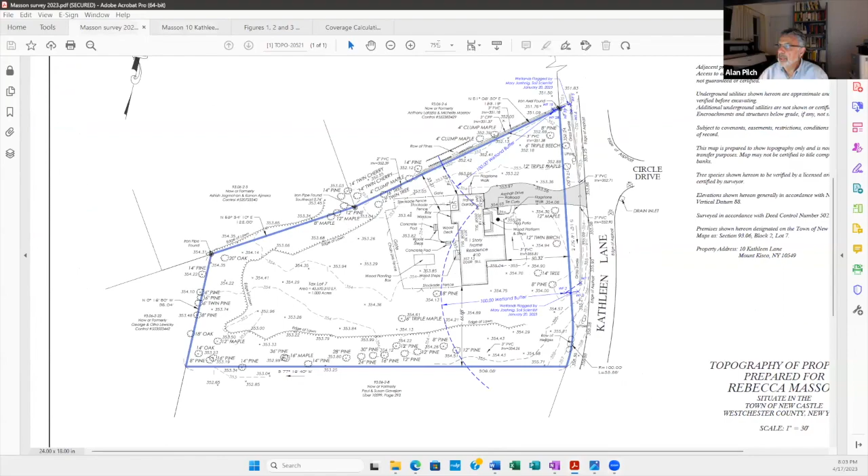Let me just start with the survey drawing. Property is on the west side of Kathleen Lane, it's an acre in size. There's an existing house in the central portion of the property. There were a couple of wetlands identified in the field by Mary Jaehnig. She identified two wetland areas located at the corners of the property, if you will— I'll say associated with, but she didn't mark them out.

And when I visited too, there's a grass swale on the property, kind of parallel to the street. It runs both on the east side of the street, the other side of the street, and this side, and they're really like grass ditches.

They only carry water during precipitation events. When I've been there, they've always been dry. There's a little culvert that runs under the driveway, continues further north, and this continues all the way further to Kathleen Lane's intersection with Bedford Road, Route 117.

You can see here the 100-foot buffer shown on the property. It includes the entire driveway, good portions of the house, just a little bit of the house was excluded out of the buffer. So that's what was identified on the property.

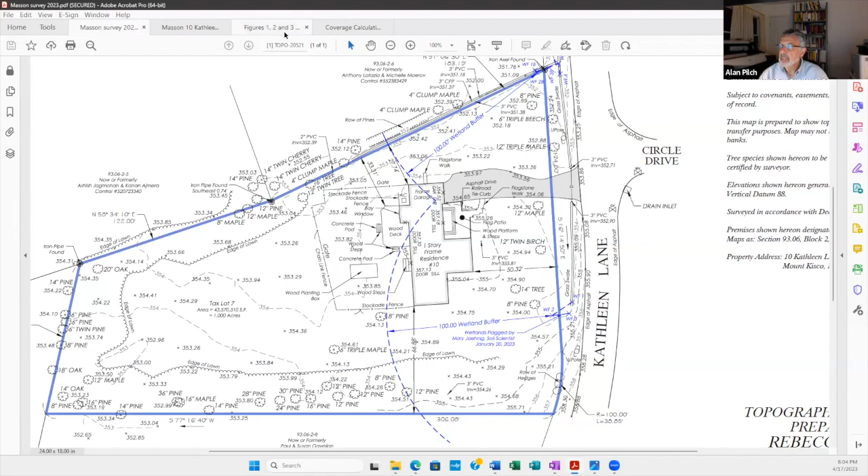I'll go to what's being proposed and break it down. What's being proposed on the property is to construct a new garage attached to the house and convert the existing garage to living space, and also construct an addition at the back of the house. A portion of the garage would be within the 100-foot buffer. The house addition is outside the buffer.

The driveway is also being realigned because the current driveway comes into the garage, and it's being realigned basically to access the new garage space. In addition, there's an existing extensive flagstone entry that's going to be redone, with a new bluestone walk to the entry itself. That's basically what's being proposed on the property. There's some drainage work too, which I can go into afterwards. But I'll just show you what was analyzed on the property.

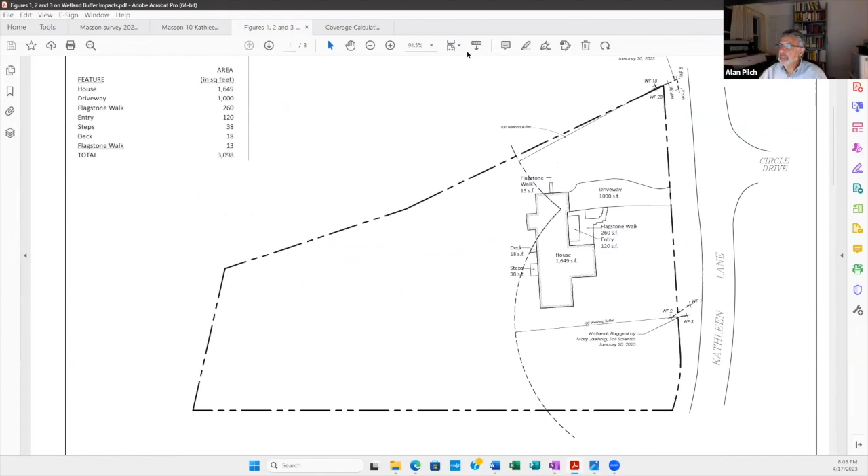This shows the existing impervious surfaces within the 100-foot buffer. As you can see, there's 3,098 square feet of impervious surfaces in the buffer. Most of the house, all of the driveway, that flagstone walk in the front, and a little flagstone walk on the north side of the house, north being up.

The removals are shown on this because the driveway is being realigned to access the new garage, which is going to be located here. So what's going to be removed is portions of the driveway, portions of the walkways which are no longer needed due to the existing entry being reconfigured, and another portion of the driveway that's being reconfigured as well. So it's going to be removed.

Finally, this is the new impervious surfaces. This is essentially the new driveway to the garage, so that's a new impervious surface, and that's the portion of the garage within the buffer. As you can see, the net new impervious surface is 50 square feet. There's removals of 648 square feet and new impervious of 698 square feet, so it's a net increase of 50 square feet in the buffer.

That's what's being proposed. Are you counting the new bluestone walkway? Yes, that's all in the calculation. That's in the new? Yes, it is. It's part of the calculation in here too.

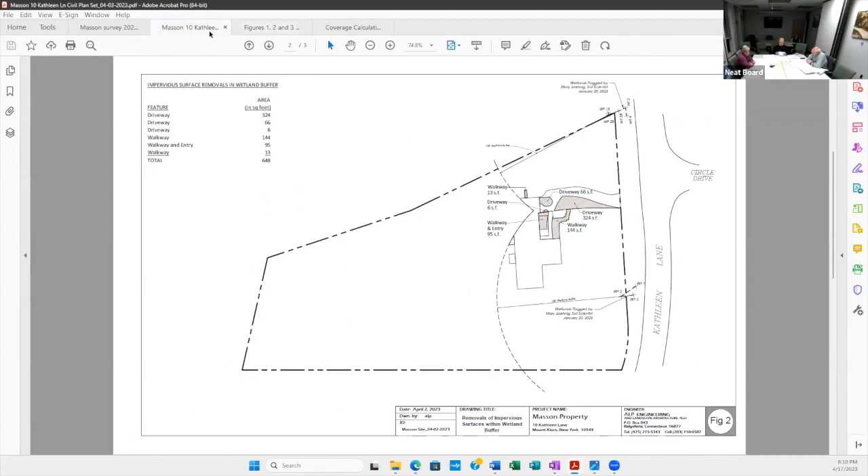Finally, there's a mitigation area being proposed, basically to fill in an area that has a view to the street, but there's also a rain garden being proposed. There are some drainage issues with the house, so we're constructing a rain garden here which would filter and provide water quality improvement. Afterwards, if there's any excess runoff that doesn't percolate into the ground, it will be directed towards the mitigation area.

Is there anything else you'd like to add to it? I'm not asking if there's anything you'd like to add—otherwise, if the board wants to run through what's happening with the architecture and why that garage is going there, I'm happy to show that to them. I can unshare if you like, and then I can certainly open it to comments from the board.

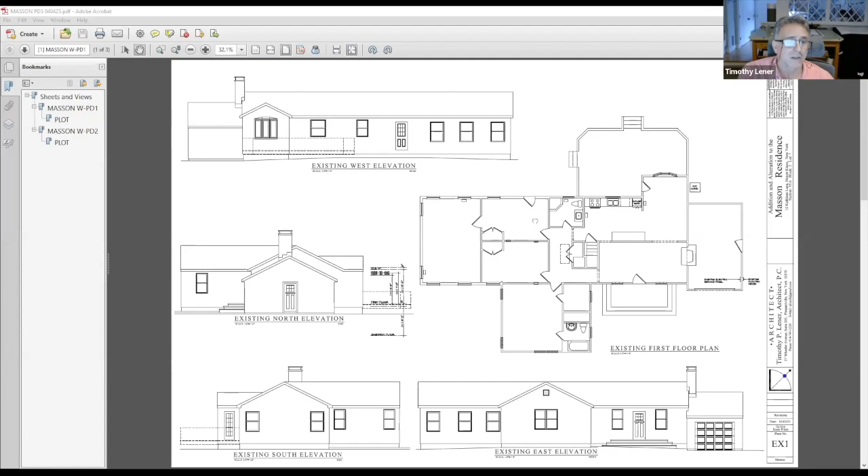So this is the existing floor plan. This is the current entry into the house, and there's a large wooden platform with steps that go down here, with flagstone paving around it. So you actually walk directly into the middle of a pretty small living room—I guess that's what they'd call it. It's very closed off from the rest of the house, and the fireplace is off center.

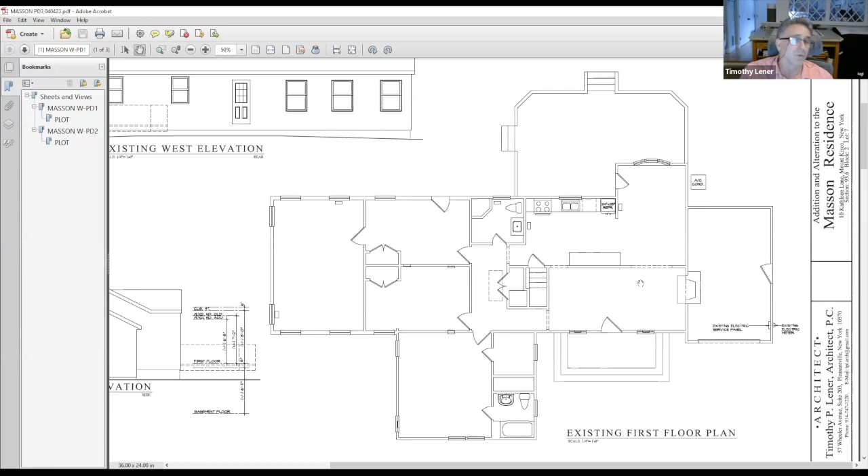There's no other way into the house from the garage—you actually have to go out and into the front door. The kitchen is pretty minuscule in size. So the idea was to recreate a new entryway further over in this corner, take the garage space and transform that into a new mudroom and kitchen off the back, and build a new garage off to the right-hand side, which you'll see right here.

This gives you a better idea of a blow-up area of the walkway, with new flagstones—but this whole entire area is already impervious with stone and that wooden platform. So portions of that can then be transferred back to green space up against the house and soften the look of the house.

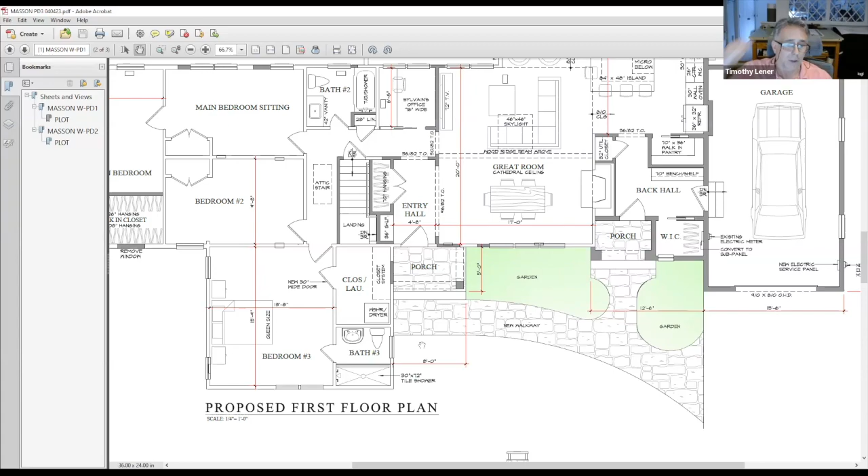So this is where the new entry will come into the house. We can give them a coat closet, take out a wall in the middle, and now you've got yourself a real living area where you can share the seating and dining space. A new kitchen will be constructed in the back.

This is the portion Alan mentioned that's not part of the wetland buffer, and the wetland buffer is right in here. However, as you saw, most of the house already is within the buffer. This is the area where the existing garage is—you can't really even park a car in there right now because the chimney sticks into it.

So we're reclaiming that space to create a side entrance—a real mudroom entry that will allow people to come in both from the front and from the garage. There'll be a few steps down into the garage for a car. We've left enough space so that trash cans, gardening equipment, and vehicle all have enough room to fit.

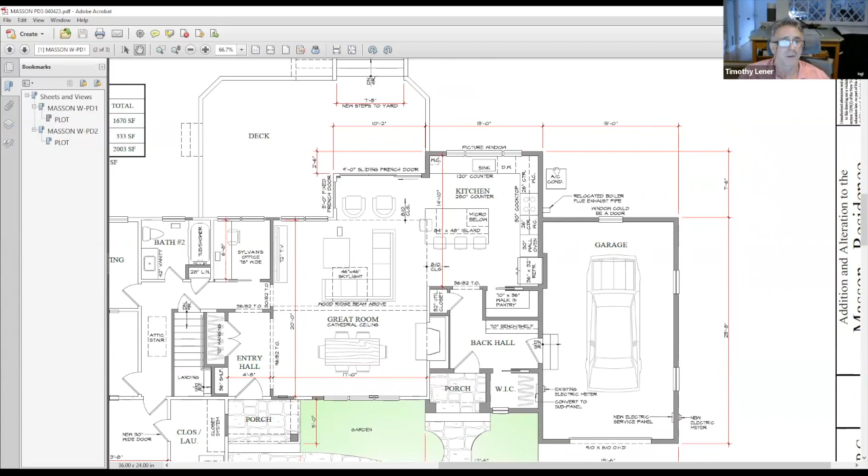So you might ask, why did you put the garage here and not further back? Well, there's a couple of reasons. There are mechanical issues in the house—they currently have a boiler in the basement that direct-vents right out the side of the house here, and I'd rather not relocate it entirely, though we're extending it. They also have an air conditioner in a nice spot on the property because it's shielded from the outdoor living space.

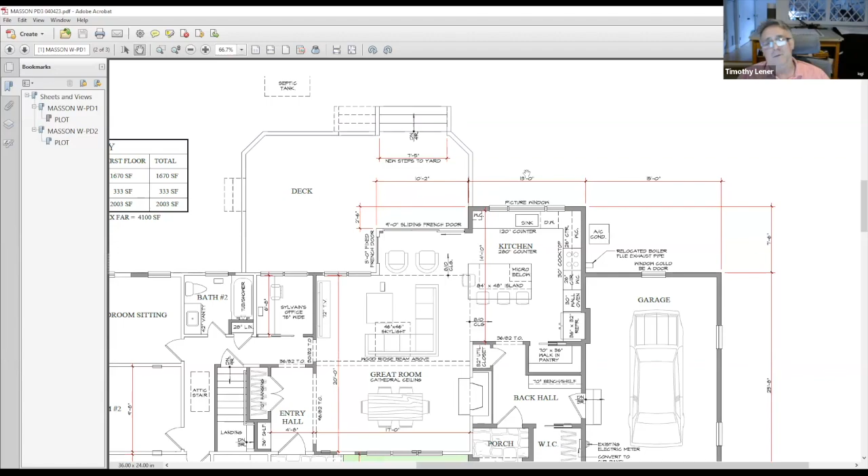Something else to mention is the backyard is where the septic tank and septic system is, so it's basically impossible to build anything new back in that area outside the buffer. Unfortunately, our garage and driveway are all within that buffer, and that's part of the area we're trying to enhance and make a little better. So the garage back wall is set here, and the front wall is enough for a car to adequately fit.

It just turns out that sliding the garage back any further will increase our impervious area because we'll need more driveway to access it. So we thought it better not to have that issue.

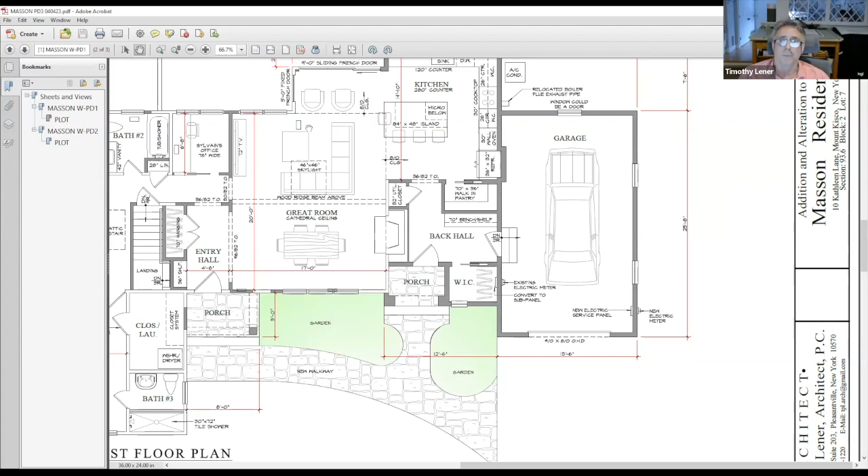Seeing these step backs in the floor plan will give a pretty nicely enhanced look at the house, with a small gable projection where the garage is for smaller scale, and then a larger, higher roof projection above the main area where the current garage and the new garage meet.

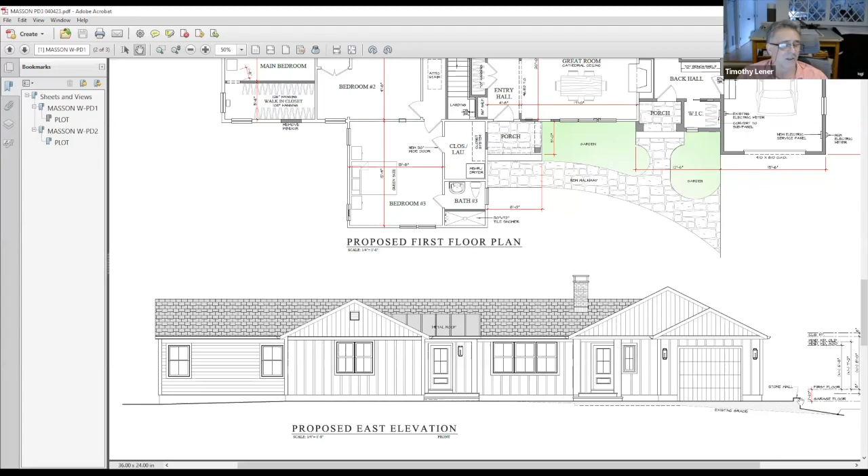There'll be a slight regrading here, as Alan showed on the map, with about an 18-inch high little wall to level out this area for the driveway.

My site plan is a little more colorful than Alan's, so this might also help you visualize what's turning back into green.

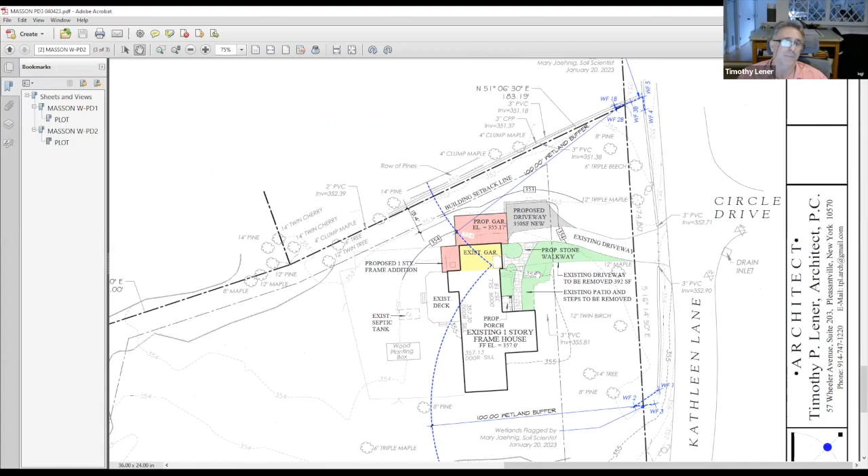All of this jagged area here is currently paver impervious area that's going to disappear, as well as some of the driveway. There'll be a minor regrading here just so the car can be level coming into the garage and parking on the driveway.

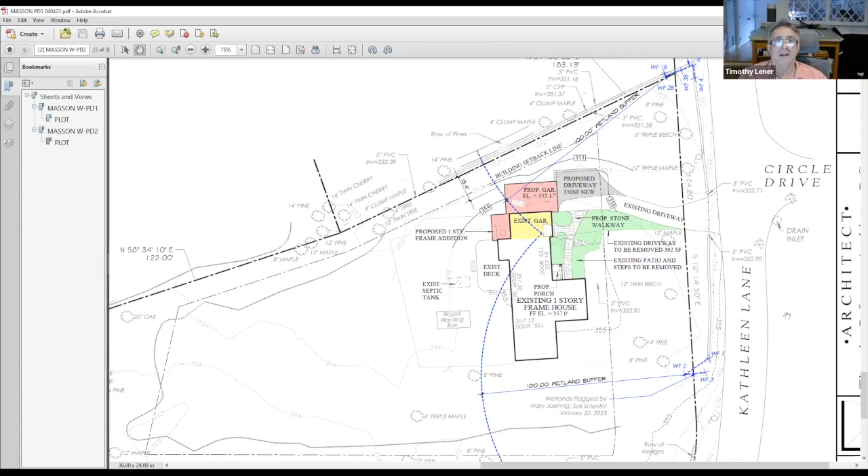That's my portion. If anybody wants to ask any questions of me or Alan.

I have one question on the new driveway. How are you handling the runoff on the driveway? I see you have piping from the house leaders, but what are you doing with the driveway?

Originally, the driveway basically drains toward the street, and we weren't really planning on modifying that. It's not really changing all that much in total area. We weren't planning on picking up the runoff from the driveway. Currently it drains from the present garage down to the street, and it would in the future as well.

So none of it, you don't think any of it from the new asphalt is running down the grade into the wetland area?

Well, I suppose a portion of it may very well could be directed - I'll call it the driveway apron.

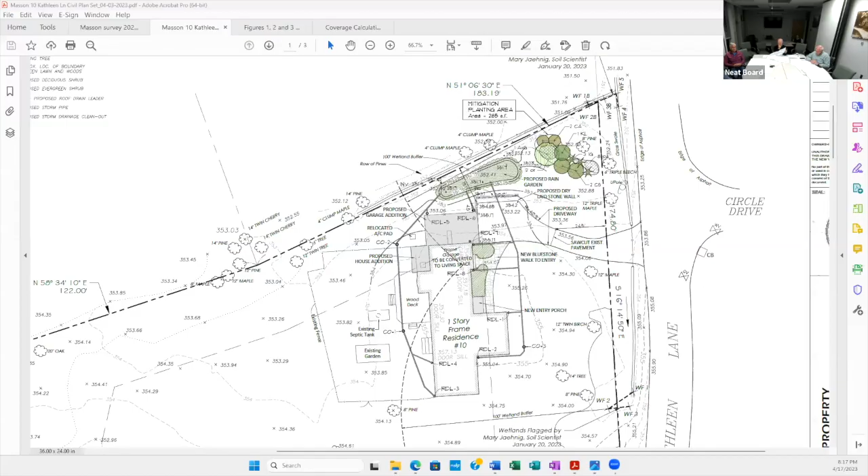Maybe I could share my screen again just for a moment. Only that you have a line going underneath it - maybe just add an inlet. I'm just thinking that potentially there could be something here for the runoff. Can you see this on the screen?

Perhaps the runoff from here could be directed into the rain garden. So we're picking up this much of the driveway and directing it into the rain garden itself. That could be done through a swale or something like that - something very straightforward. An inlet would be hard to do.

You have the wall there - potentially it could be done that way, though it'd have to go around the front of the wall, I guess. There's a very low wall here, but it could actually go around into the rain garden, so we could do that.

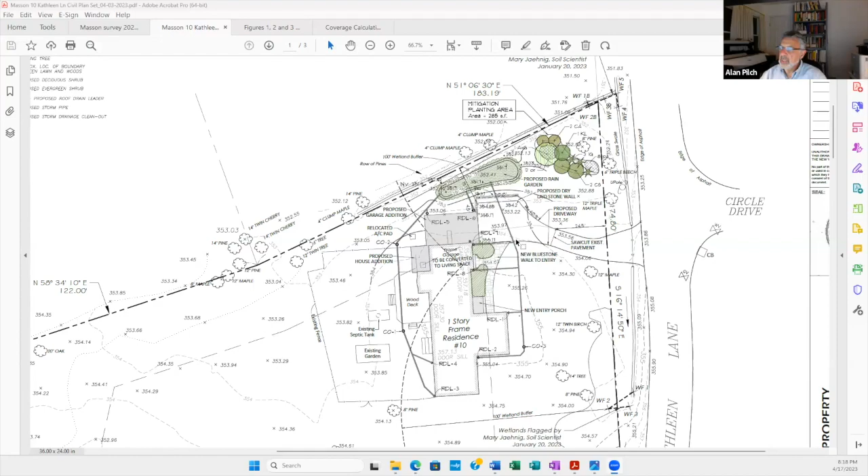So you're picking up this much, it's really just a small segment, which is actually quite a bit less than what's occurring presently. But what's occurring presently now, you're adding into the wetland setback, so it's up for discussion. Sure, so that was one.

Two, you're showing a washout area, a concrete washout. I would suggest that there not be any washout area, that you use a box so it can be taken away completely and not create any washout within the wetland setback. So basically, you're just looking to have some type of container, if you will.

Yes, a concrete box - they just drop it off and pick it up when they're done. And that way we get rid of any juice that's going to slip out. Okay, that's fine.

My other question is, you're showing a drainage line going underneath the wood deck - is that wood deck to remain? The wood deck is to remain, but we're going to refurbish the boards on top, so there'll be access to get that pipe underneath the deck.

By the way, I want to mention there's a lot of pipes on this house running all the roof water every which way, and a few of them are directed to that northern portion where Alan put the rain garden. I think tying in all these roof lines to one uniform area is going to be a huge improvement for this north side of the house, which right now is a mess - you can actually see some of the pipes above ground, lying on top of the ground in a few locations.

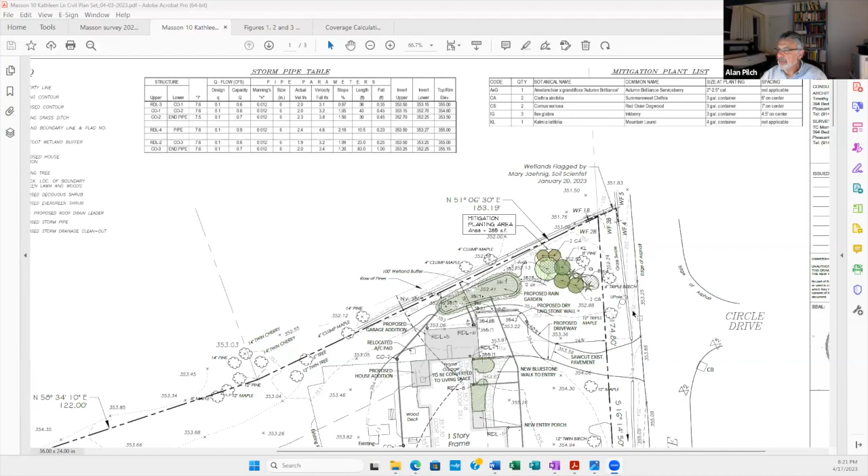The idea here is that since all the runoff on this property heads either to the grass swale and ditch on this side, or drains this way, the idea is to try to intercept it. It'll help remove some lawn area, provide a place for native plantings, and help infiltrate some of the runoff into the groundwater. The overflow from the rain garden would be directed towards it, providing some benefit to the wetland area and some habitat as well.

I looked at originally, I know this is like a hydric lawn, but it's only about 5 square feet here, and this portion of the wetland area is actually located off the property. Usually in situations like that, if I saw a hydric lawn I'd say that's where I'm going to plant, but at 5 square feet I could put a shrub there, but it would be on its own. That's why I ended up looking at this location, since the existing condition shows all the runoff running this way into the ditch and continuing to the north. So that was the derivation of it.

Also, this will provide some screening of the house from the street.

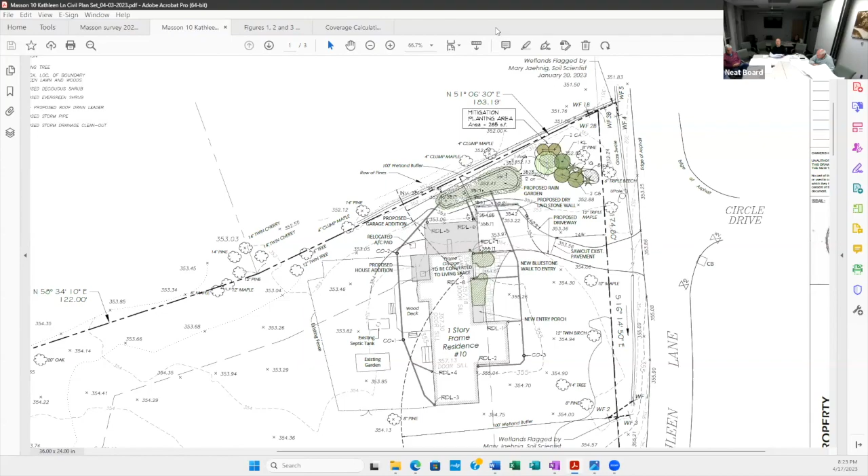I can unshare. Does it ever have any effect on any of these tenants if they're in a flood zone? I don't think this property is in a flood zone. I don't think so either, but it's interesting.

This house has a sump, presumably? Yes, it does. Right, okay. So this is, I can only describe this as an odd spot of town in terms of...

Well, it's a flood zone over there. Right, and you have these ditches, they're all mapped as water courses on Westchester GIS. I'll start with across the street, to the north of Circle Drive, there's a similar grassed swale that I wouldn't consider a water course or a wetland. Then where it starts to get a little bit damp, there's a bunch of riprap and then it disappears into a catch basin. So I look at that as something that may have existed historically when they developed the area, and they're trying to push all the drainage as they can in that direction.

And this property, it doesn't show up on Alan's plan, but it shows up on the survey. There's a discharge of the sump where it says a 2-inch PVC, which is outside of the stockade. You see that pipe, and that area is really wet. Then it dries out almost immediately as you continue along that border of the property.

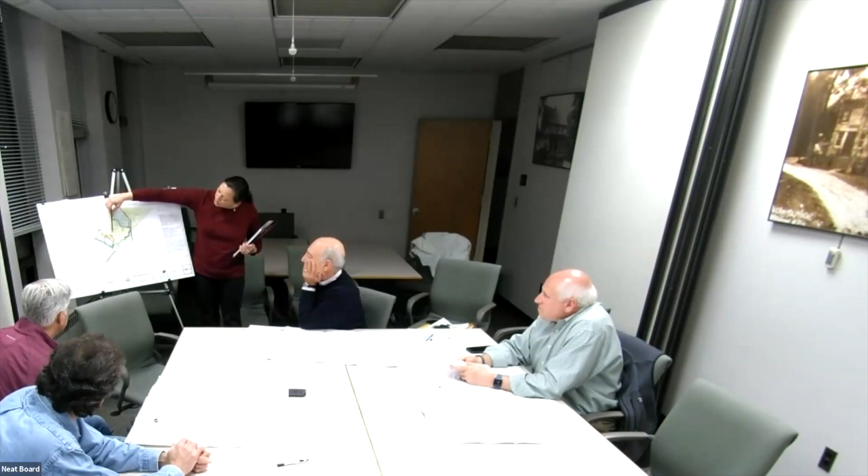We were waiting for the DEC to accept Ms. Jaehnig's flagging, and they're in agreement, so I imagine something in writing will be coming to you or to Dennis stating such. The reason this is important is because even though this portion of the deck exists and is being replaced in kind, you can see that the 100-foot state wetland setback comes to about here, and visually, graphically, it just clips a portion of the new landing, the new deck.

But in reality, no portion of the new deck will be within the 100-foot buffer, because it's 3 to 5 feet. It was measured back from the wall originally, or the assumption was about the wall - let me check, and correct me if I'm wrong, Mr. Fritz - there is an image in the application package where they took the overlay of the existing DEC freshwater wetlands map, which is at a 1 to 24,000 scale.

So when they were close, they said, look, you need someone to delineate the wetlands. I need to know whether you're in the wetlands or out of the wetlands. And also from the perspective of the state, I need to know whether you potentially need a DEC permit or not. So when Paul...

delineated the wetlands, I went out and inspected the line, and I agreed with Paul, and it was offset from that wall further into the woods. So where I saw his flags, I said, well, if DEC agrees with this line, then I believe what's shown there is going to fall out, and they're not gonna have to worry about DEC, they'll only have to worry about the Town of New Castle. And that's where I think we sit at this point.

Mr. Peskin is aware that for this project he's gonna have to produce a survey, and that's going to include Paul's delineation and the acceptance from DEC, so that we have for the file, A, whatever building requires with respect to the final construction, and then B, the wetland delineation line as surveyed overlaid onto that plan. That's required prior to receiving a C of O. We've had that discussion.